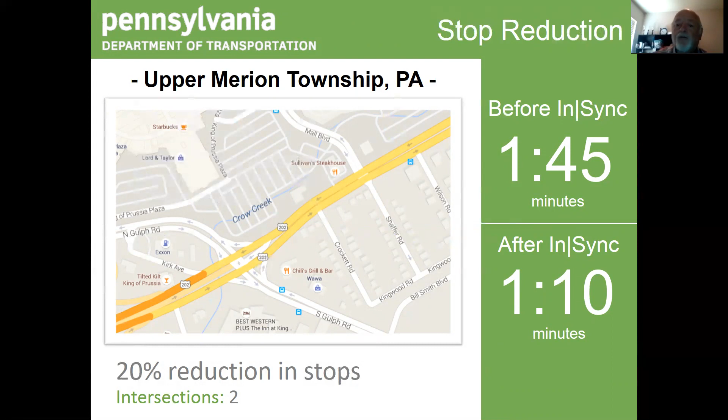Let's talk about an even smaller deployment, for different reasons. This is the city of San Ramon. When I first started my career in traffic signals, it was for the city of San Ramon, one of my very first customers. I know them intimately. They are a park-driven quality of life town. Here, they used CMAQ to get funding to deal with emissions from people coming through their town, not even living there, and polluting the air with their cars.

They found that after InSync was deployed, they saved over 100 gallons per day of fuel being consumed. 29,000 gallons a year. That's Monday through Friday, not even talking about weekends. There was a 38% reduction in emissions in this half mile. That's just over 5 intersections and a half mile. Those are great numbers.

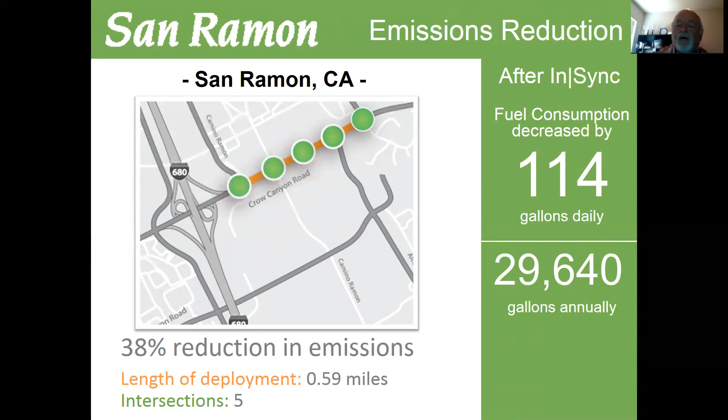Now, we're going to talk about San Diego a little bit. And again, given my experience, I know San Diego, when a new technology comes in or a new application comes in, they look for the worst example that they can give you to test it. They don't want to give you something that can be done. They want to give you something they fear can't be done.

And this is one of the worst examples of congestion that we've had at Rhythm Engineering. It stretches from Highway 5, you can see here, all the way over to the ocean. Now, this is the college town. Now, what happens at a college town when the sun comes out? That's right, everybody goes to the beach. Well, they felt that if we could give them bidirectional platoon management, progression, and we could cut down on some of the delay, we'd better balance the traffic operations on this and give them what they needed.

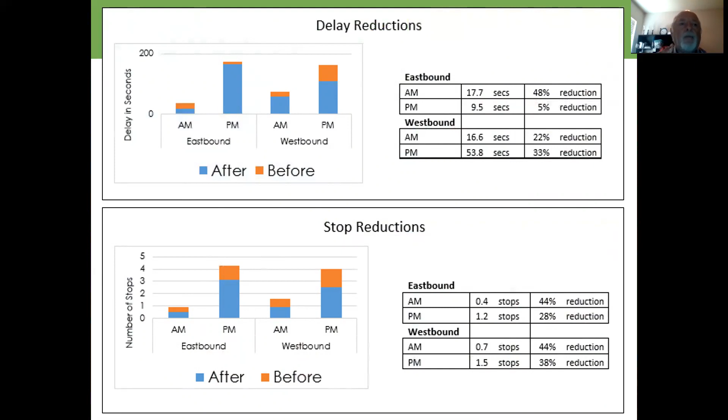Let me show you what we actually provided. This is before and after. What was a 48% reduction in delays from the travel, a 44% reduction in stops. Now, this is both eastbound on the AM, but even the minor improvement would be the westbound and the PM. You can see that we still did a really, really good job at making an improvement across the board. Average speed, same thing. Travel time reductions, exact same thing.

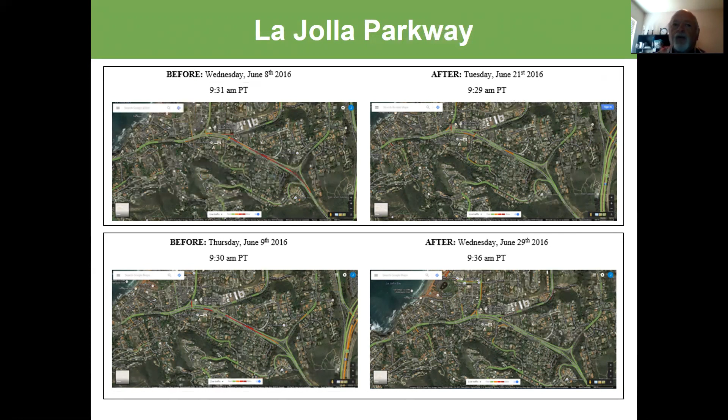So how do we know this is working from a casual observation? Google, and you may not know this, but your cell phones trigger the Google Maps with regards to the red or the yellow. You can see it before and after here on this slide. The red is prior to our install. You see a bunch of red there on the left-hand side. On the right-hand side, it's all gone. Same time frame, same days, it's all gone. It's gone from red to just a little bit of congestion. That's not us saying it. That's not an engineer saying it. That's Google saying it from people on the road.

Another example of metrics would be VDOT. Here's a great example of a major study that was done to understand just what optimization could do for you. This is the 5-year study, 3 years before deployment and 2 years after. And what VDOT found over 151 intersections, 13 corridors, combined, they found a 67% decrease in stops. I mean, that's almost like not stopping at all. A 36% decrease in travel time. That's significant. A 58% increase in average speed. Again, not speeding, but because you're not stopping, there's no delays, there's no frustration. Everybody goes a little bit faster.

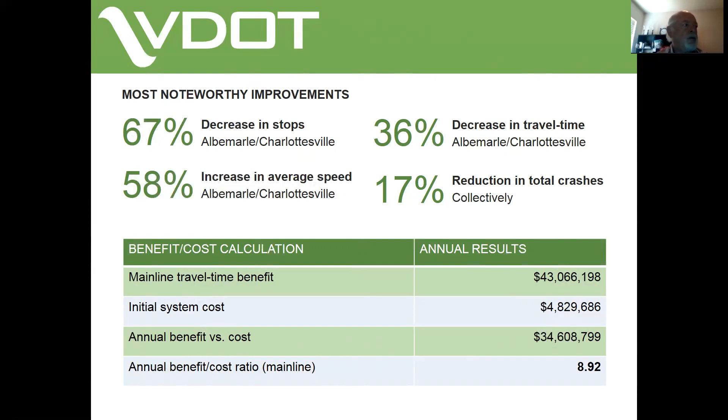But bigger than that, remember that statement in the mission statement about safety? They found a 17% reduction in total crashes collectively. That's an amazing number. I don't know anybody else that's even come close to advertising that. This is verified proof done by VDOT. But let's talk about the economics of this decision. They found for every dollar invested, they got back to the constituents $8.92. Isn't that your job? Isn't that our job to save our constituents money and time?

So some of these numbers you're seeing are not only from us, which we will give you befores and afters, but we like for you to have independent evaluations. We think that it's a better means of you being able to rely on those numbers, not letting the fox tell you what's going on. So FDOT, VDOT, and PennDOT all have significant deployments, 450 or more intersections in their states. Very happy with our system. They have those metrics, and they've been able to prove performance.

But if you're not a DOT that has those types of resources, there are many, many engineers throughout the nation that understand this process, understand travel time, and can give you accurate representation of before and after. We highly suggest that you do that. Now, once you know us and trust us and there's a relationship, you may pass on that. You may pass on just because of our reputation now, but we suggest that you do that.

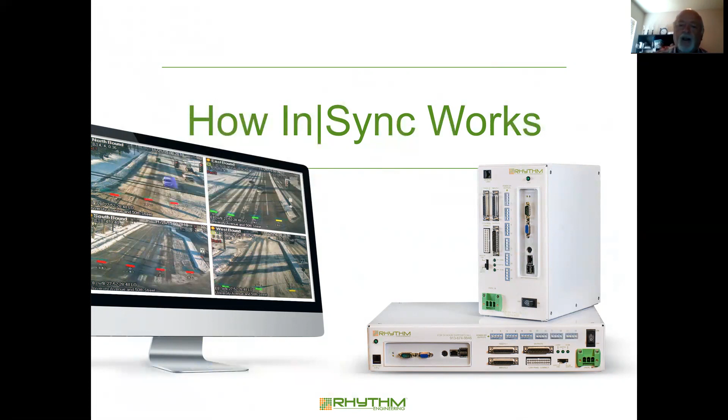We have three basic idealisms that we chop this process into. One is analog to digital. We're going to take that information that's out there and create it in a digital state so that it can be used in real time with real-time action, not looking-back action or post-action. We have the local optimizer. The local optimizer is basically just that standalone intersection. And then we have the global optimizer. Well, the object is to get people across a large corridor, right? Two or more intersections. That's your plan. So the global optimizer is all those intersections connected into a corridor.

So what is the first step? Analog to digital. Well, on the left-hand side of this screen, you're going to see the analog controller. That's what was out in the field 20, 30, 40 years ago. Some sort of cycle timer, split cycle timer. And reality is that controller on the right-hand side, now the latest and greatest, state-of-the-art, whether it's Econolite, Naztec, or Siemens, really is nothing more than that analog controller. It does the same exact thing, has the same restrictions.

You may be able to store 200 or more timing patterns, but you're really just complicating the problem every time you issue a timing pattern. But that's what it is. It allows you to maybe make changes remotely, and that's really necessary. But the function is no different than the analog controller. That's why we call it the electromechanical controller emulator.

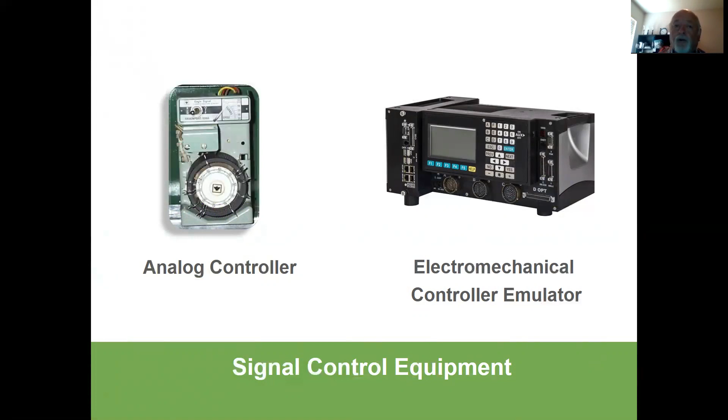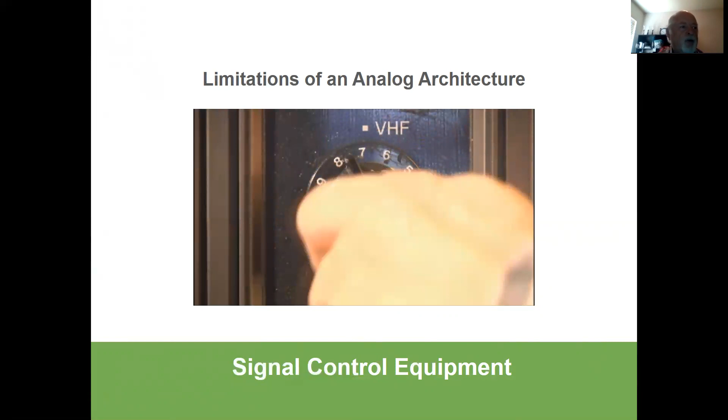So we're going to talk a little bit now about what we mean by analog. Some of us may remember, I know I'm old enough to remember sitting in front of the TV and your dad says, hey, we're on channel 3, go put it on channel 11. You had to get up, walk over, turn the dial step by step to get to 11. Well, we don't do that anymore. But that's an analog process. You're going from one point to another through multiple steps.

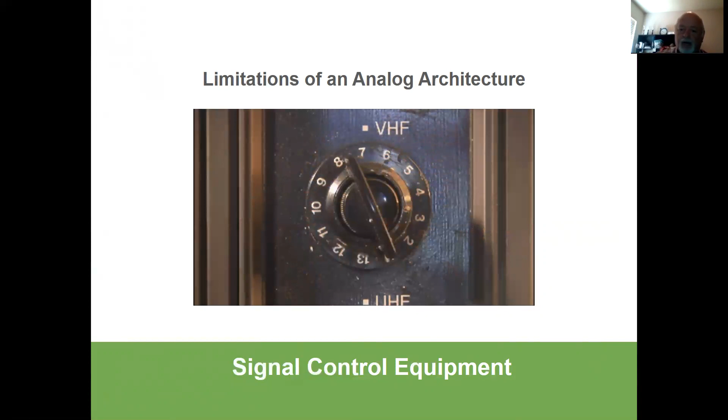Another description of adaptive with an intuitive process would be 1920 in Detroit. This was actually the very first adaptive signal in the country. In the middle of that intersection is a kiosk, and inside that kiosk is a traffic cop. And they have red and green Mylar that they put in front of a candle or a light to tell the traffic what to do. But that traffic cop is there live, real time, can see traffic coming, can make intuitive, smart decisions. What needs to go next? Who's been waiting the longest?

This is what the Fed said in 1993 needed to happen. I mean, they put hundreds of millions of dollars out there for adaptive systems, and they're being turned off because they weren't doing it right. They weren't reacting to queue assessment and real-time delay calculations. This cop could do that. Intuitive, smart decisions based upon real-time traffic, real-time actions, real-time data.

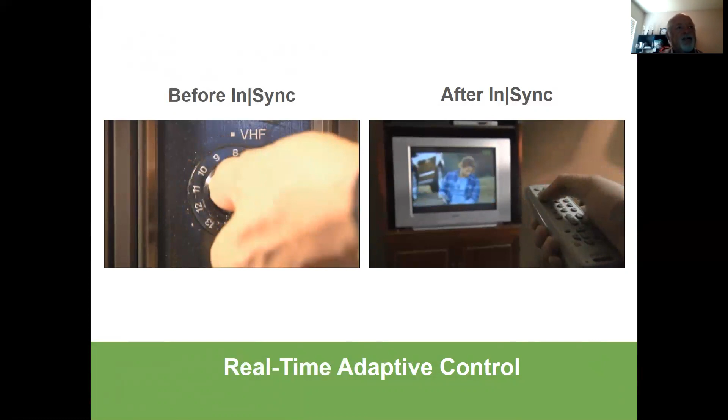Let's jump back a little bit. Let's look at the analog process and now the InSync process. This is the comparison. You can all get your teeth around this and feel this. Turning a dial versus hitting 500 and hitting enter. That's the difference in speed. That's the difference in decisions. That's the difference in real-time actions. That's what we're talking about. We don't take data and every 15 minutes decide what to do about the last 15 minutes. We're doing it right now, within the cycle.

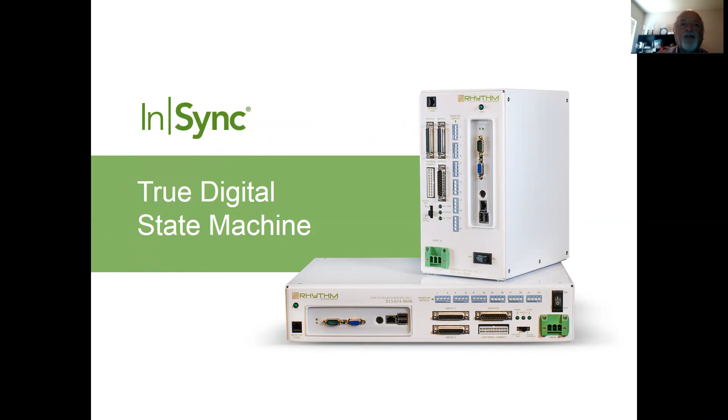So how do we get this done? What allows us... a machine that acts... decisions based on real-time data and real-time actions? It's not a black box. It's a state-of-the-art machine that allows us to do things intuitively, quickly, real-time.

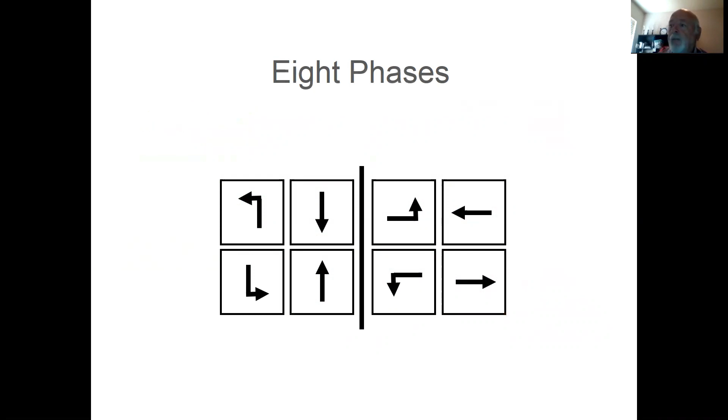I'm going to show you something here that basically is just what we all know in the traffic signal industry as a ring and barrier. We have 8 phases. We're going to run those 8 phases, 1 through 4 on the top, 5 through 8 on the bottom, and make sure that we don't have conflicts and that this is the order in which we will step through. That analog process, phase 1, 2, 3, 4, phase 5, 6, 7, 8 simultaneously, but it's an analog process. I have to do these phase pairs in this order. That's the ring and barrier. And you're going to see it sort of perform here. We all understand this if you've been in traffic for any period of time.

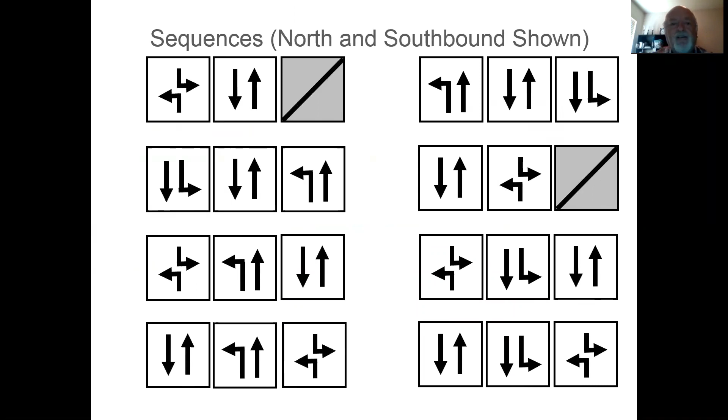What we said was we should have a way with today's technology to basically rename it. Call it a pair state by a digital name. Then if we need to serve A1, we serve A1. If we have no demand for A2, we might be able to go right to C5. Well, that's a smart decision if you have no demand. Now, some people will talk about driver expectation. We're going to cover that in a bit, but this is smart.

Your job as a traffic engineer is to move traffic and do it as quickly and as smartly and as intuitively as you can, like that traffic cop. Right? The controllers cannot do that. And anytime adaptive resides on a controller, it has the same restrictions. It can't move traffic as efficiently as it needs to be done.

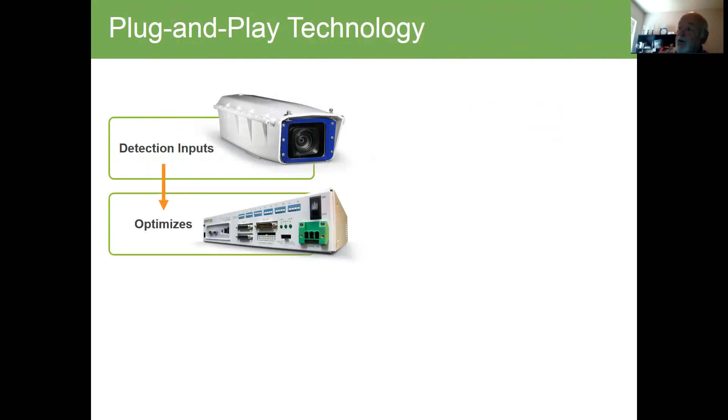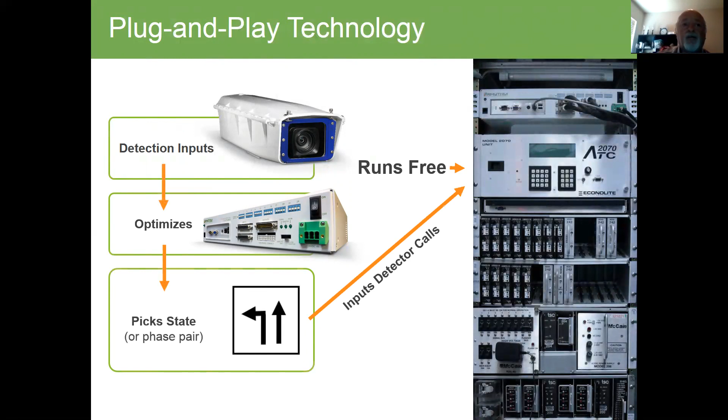So, that all being the case, let's talk a little bit about failure mitigation, because that's really important. So I've told you basically how we do. We're going to get into the nuts and bolts in a bit, but what if something went wrong with our system? What if it broke? This is not a perfect world. Things happen. So we have plug and play technology as far as vision and detection. We have optimization. We pick a state in an intelligent way, release it to the controller, and bam. It does. If something went wrong, the controller just takes off and goes like it was before. Right? And we'll cover that in more depth again.

The local optimizer, that's the next step. This is kind of bringing some of those things together. What is the local optimizer? That's that standalone intersection. I'm sorry there's a little green flag there across the top. I wish it wasn't there, but this kind of shows you what we do.

We're looking at an approach, and we're looking all the way down the approach. And we can see as far as the camera can see. And then what we do is we segment that approach, and we can actually tell how many vehicles by numbers are actually in that approach. And we also know when they got there. So we have a delay time, and we can measure that. What did Einstein say? If you can't measure it, you can't improve it. But when you can measure it, the conclusion is you can improve it. We needed a technology that allowed us to measure it. And that's one of the things that Reggie developed and patented in 2008.

So let's put it in maybe different language for you. We're going to call this the greedy algorithm. This is going to oversimplify what we do, but it's going to try to explain to you how we look at and how we come up with the metric of making decisions. Let's pretend that you're a traffic cop and you have a roll of gold coins. And what you're going to do, you're going to hand out a gold coin every time a vehicle stops and waits. And every 5 seconds they're there, you're going to give them another gold coin. Well, pretty soon, you're going to run out of gold coins. You're going to want to get them back, right? So you can hand them out to somebody else. This sort of oversimplifies our thinking, our algorithms, and our process, but it's a good way to get your teeth around it. Here we go.

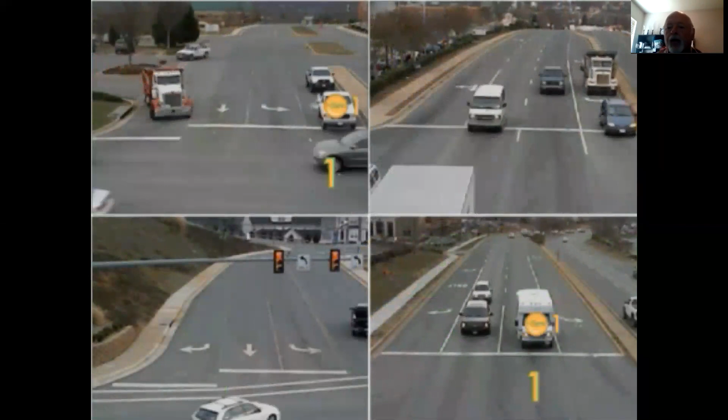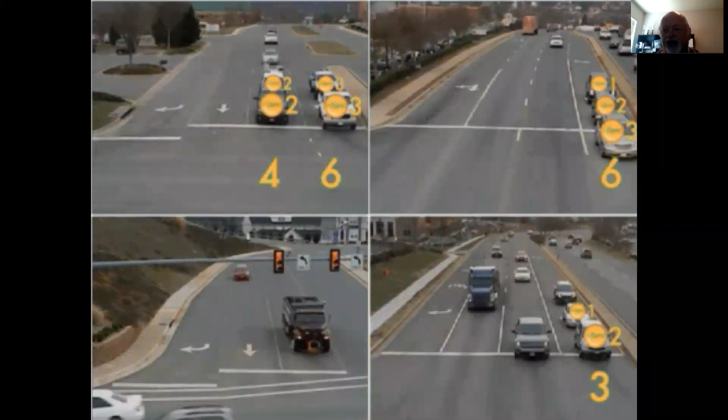So you can see that on the right-hand side, that's the mainline progression. They're both going now. Your left turns and side streets are starting to build up. They're on the left-hand side. And you're going to see the left-hand side start to get higher in numbers than the right-hand side left turns or side streets. Well, when it comes time to gap out and do something, the computer can then say, wait a minute, I'm going to go to where we really need to go. And he serves that side street. Or he serves a left turn.

So here we are again at that same ring and barrier digital state that we started to come up with, and we're going to show you another way of explaining this. Let's say this time I needed 18 seconds because I know how many people were there precisely, and I can put a number to that I need to run. I don't have to run min or max. I can run it for 18 seconds.

And then I don't need to go to C5. I need to go to C2. And I need to give it 22 seconds. I'm able to do that because I have real-time information that allows me to make real-time adjustments of the moment, of the second, of the cycling. But then I don't need to go serve C3 because there's no traffic, so I can move on.

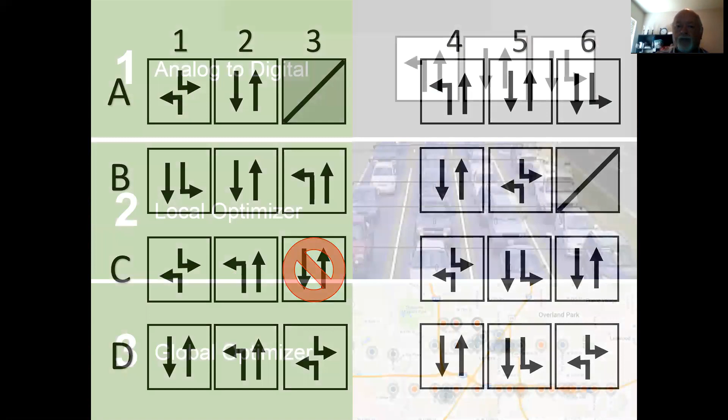That's the local optimizer. So let's talk about the ultimate plan, and that is the ultimate goal, and that is to get the global, the corridor connected and working together. What we're going to do is we're going to schedule mainline progression, but a little bit differently than most systems. We're going to give bidirectional mainline progression. And then when the mainline's not running in both directions, we're going to use that period of time for side street and left turn optimization. That's what we're trying to do.

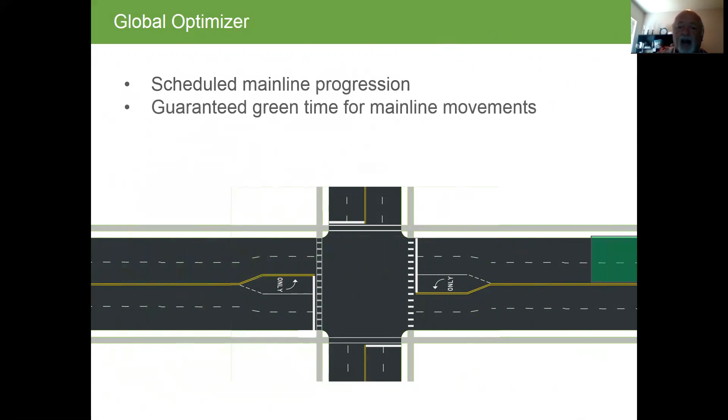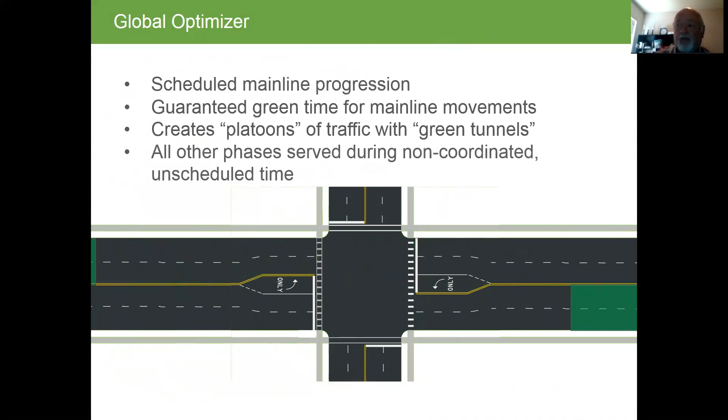That makes sense. So we guarantee green time based upon calculations. We're able to adjust that, but we're going to get those platoons and green tunnels through, and we're going to serve all other phases during the non-coordinated, unscheduled time. That makes sense. Let's put it another way. Let's do it with a calendar like you do on your phone. Everybody's used to calendars, right?

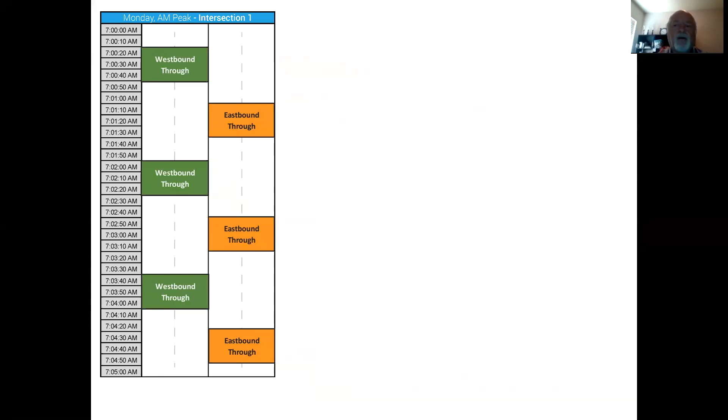So we're going to schedule, again, mainline progression in both directions. We're going to replicate that based upon demand, historical demand, numbers and counts. We're going to plan that. And then we're going to create our offsets and do multiple intersections, 10, 20, 30, 3, 2, doesn't matter. There's going to be an offset that's going to allow us to replicate that plan based upon actual numbers that are there. And you can see they're all a little bit different.

But let's say in this period of time, or what you would know as cycle, this is what we're going to measure our period of time or cycle to, that this is what we're going to use for optimization of side street and left turns, right? That's pretty common sense. But what if we needed immediately more time and didn't have enough time available to us in that particular cycle, that particular period of time? We can dynamically change the period of time without transition to the entire system. That's a huge benefit to you.

Basically, we're saying you're going to get back maybe 30% of that time that you wouldn't have in other systems because it's in transition. We do it dynamically. We virtually eliminate transition, except for possibly an emergency preempt. So we have now more time. This is now our gray area, but we can do one more thing. What if we needed to grow the westbound, but shrink the eastbound time? That gives us more time to deal with side street and left turn mitigation.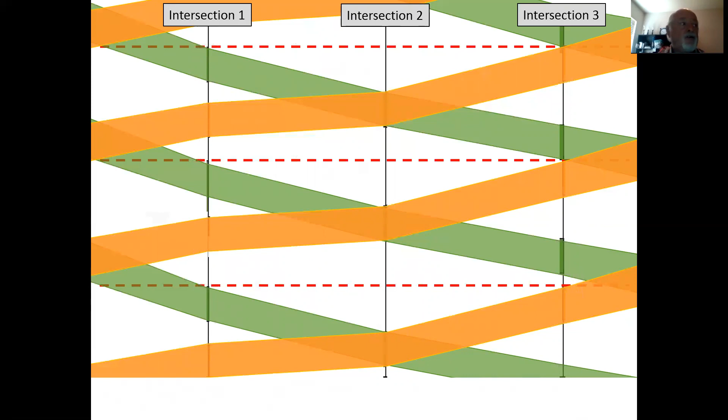And we touched briefly on failure mitigation. I want to go into a little bit more detail now. What if you had a processor failure in the field, our smart digital box? Well, we just simply fall back to controller operation. You've had time to look at our numbers, massage it, think maybe I should tweak my TOD to be in line with this for fallback, and you can certainly do that. But worst case is you're back to where you were before. It's not any worse than that.

What if we had a camera go down? Well, we have something very unique in our process. Let's say it happened at 4:05 on a Friday afternoon. We go back and look at the last 4 Fridays at 4:05, and we run that timing as an average. That's probably pretty accurate. Now, I wouldn't try to do that over a long period of time, but it gives you an opportunity to get the camera fixed.

Oh, and by the way, you do get an alert, you do know that it's down. So this allows you to run the intersection pretty doggone close to what would be needed anyhow. Pretty historical, or it's giving you current times, and get through the process.

But what if you lost coordination? One of the things we do in our system is we are distributed. You don't come back to a server. So you haven't got the complications of communication issues. Everything happens at the cabinet in the field. But if you lost coordination between cabinets, you simply would go to local optimization at the cabinet that doesn't have communication. It's that simple.

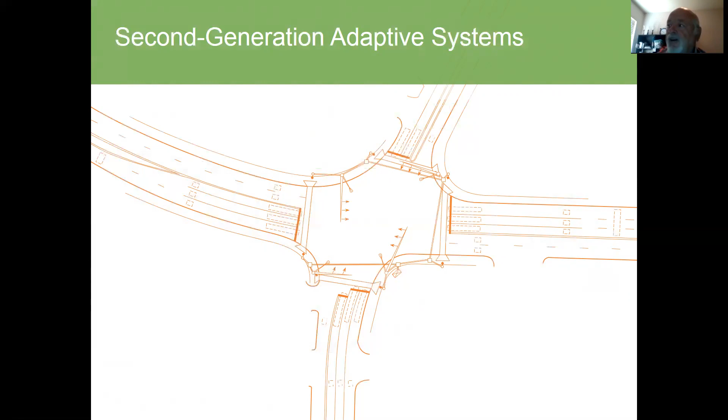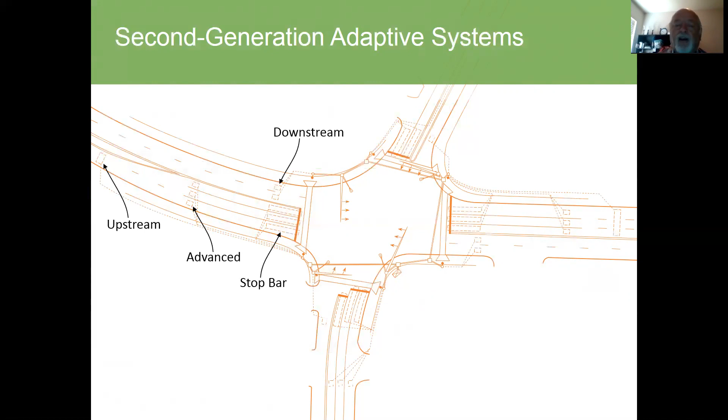Second generation adaptive systems, which was coined by Urban Systems in San Diego, basically said, look, most legacy systems use spot detection, minimal information to make major decisions. It's not accurate, it's not complete, and it's spot detection. So this picture kind of shows here's a whole intersection in gray, but we're using these little white areas to make the decision of what to do.

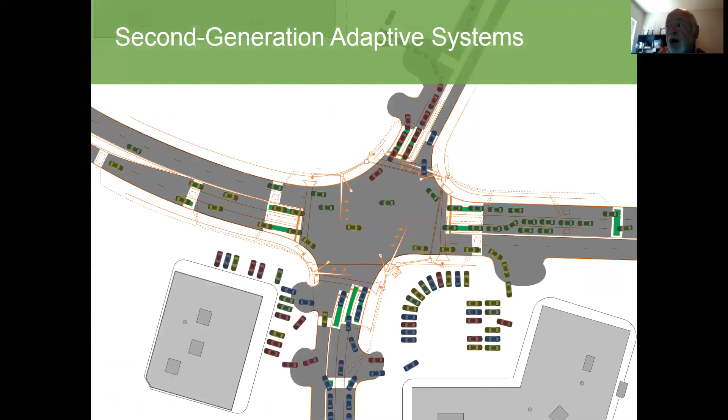Obviously, there's a lot more going on, a lot more need going on, a lot more changes going on in the gray than we're allowing to be represented to the controller. In|Sync does it differently, quite differently, actually. You couldn't afford to put that much detection out in the street. Not only that, but your controller couldn't handle the input channels when the amount of detection is here. More detection, more information, better decisions. Pretty simple.

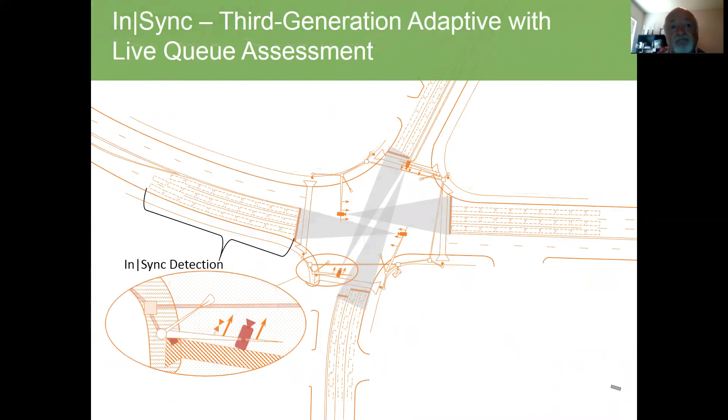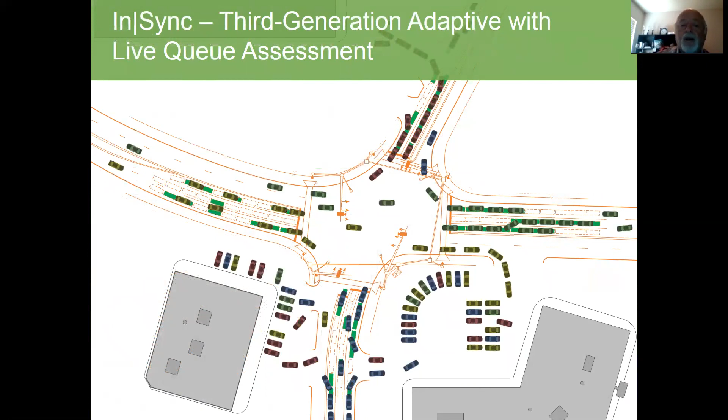So again, now traffic is coming through. We're getting more information through the entire approach. And if we look at this based upon the gray area and white area that we compared to last time, you'll see that we're looking at the entire intersection to make a decision. We're not looking at spot detection.

So to kind of sum it up, in operation, what is the difference between responsive or adaptive versus real-time adaptive operations? This shows where we're responding to a need in traffic. We have a pre-planned operation. This is what you're going to be able to do. It's not flexible. It's not dynamic, but these are the steps you're going to take to operate traffic under legacy systems.

I have a demand here where I needed more time. You can see it in the darker color. Hopefully it shows up on your screen there. But I don't have the ability to adjust it. I don't have the ability to do it within that period of time, within that cycle. So best case, absolute best case of most systems, they just do it the next cycle.

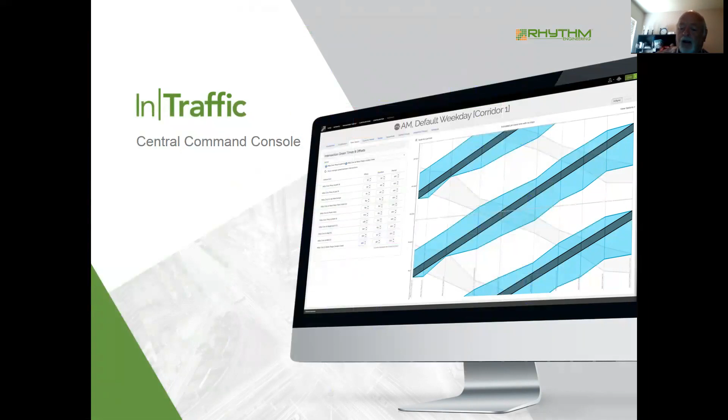In-Traffic is our central command system. Now, we came out with a new version 1.6, and we released it about 3 months ago. And with 1.6 was the In-Traffic module. It allows for you to manage the system on any device that you might have in your infrastructure with your employees. iOS, PC, Android, makes no difference. Access anywhere with security at any time.

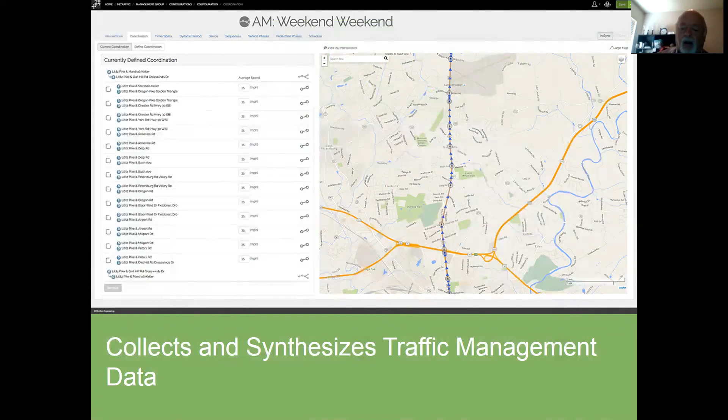We also have the ability to collect, synthesize, and give you reports based on what you're specifically looking for, what you're trying to get out at that particular moment, what information you need because someone asked you a question. We can do what ifs. Wouldn't it be nice to say, hey, you know, what if I did this? What if I tried this? What would happen? And you can do that with our system.

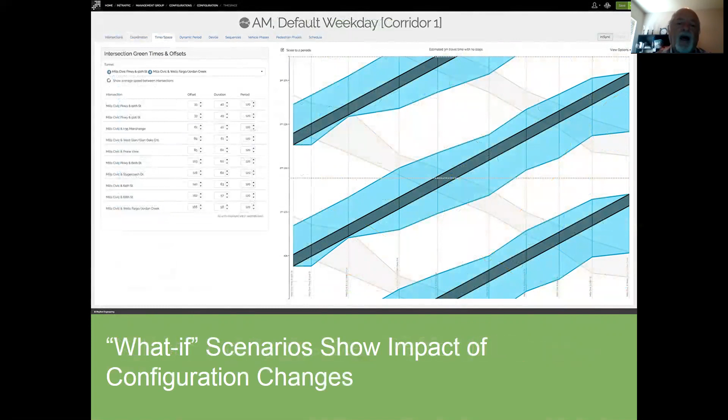Intuitive drag and click. Now, this used to be something unique that only a few special companies had because of the cost of development, but everybody has it now, just about everybody. It's really a necessary tool. It's how we learn in school. It's how we practice in real life when it comes to scientific computations and algorithms and expectations.

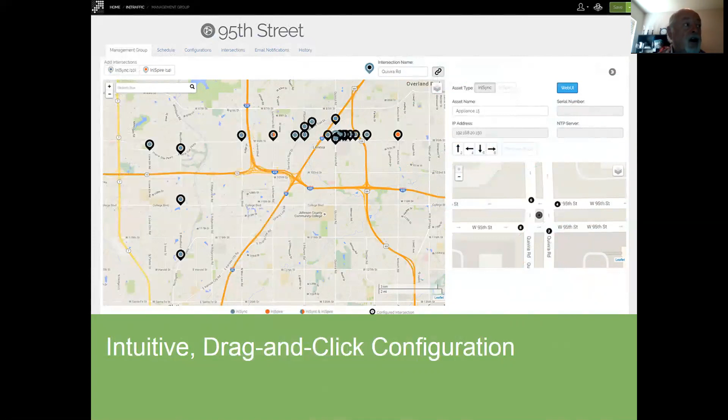So again, you know what is going to happen by watching it in advance on your system. You can see where there's detection. You can see what phases are green and red. Everything you need to understand what's going on at the intersection live is available to you through our web UI.

That's great. We have the Inform module that allows you to collect that data and to massage it and give you reports, do it in graph form, detail form. Again, you have all the tools to make intelligent decisions that are now becoming part and parcel to a system with ITS. You're not missing anything by not going with somebody else. We have it all.

So what is Rhythm Engineering? We want to be your team. We want to give you complete support. We want to do the best job available today at optimization. We want to bring technology into the fold. We want to allow our intersections to operate without constraints. We want to efficiently handle traffic volumes. We want to efficiently handle side street.